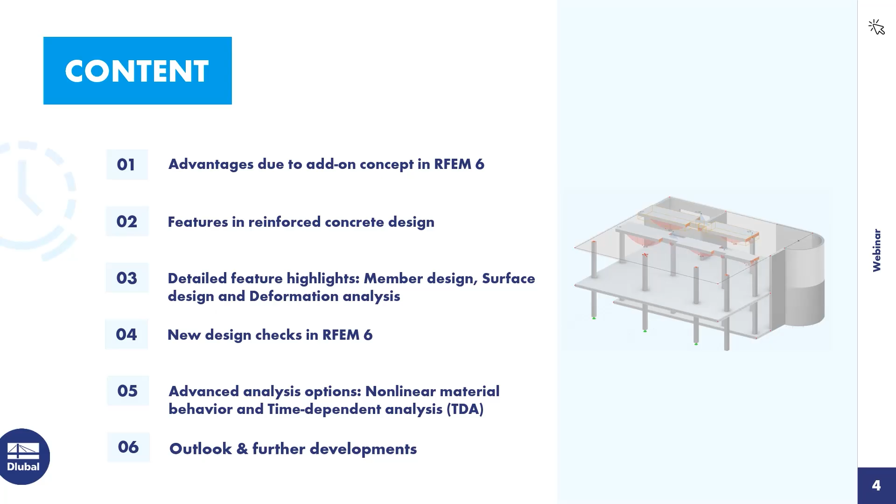The advantages due to the add-on concept: in RFEM 6 we have one add-on for the concrete design, and this add-on includes now all tasks which you need for the design of the reinforced structure.

If we compare it with our RFEM 5 solution, we had single add-ons, and it was necessary to make the design for the beam, for example, in the add-on RF Concrete Members, the column design in RF Concrete Columns, and the slab and wall design in RF Concrete Surfaces. If you wanted to make a punching design for the slab, you had to open an additional add-on named RF-PUNCH Pro. Now in RFEM 6, we have everything included in one add-on, so there are no single add-ons which you have to use.

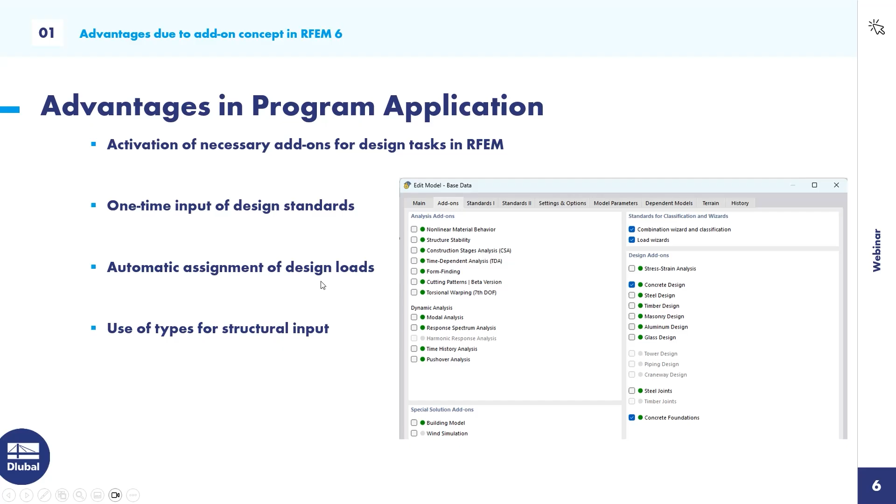This is what you want to use for the design of the member, of a surface, of a deflection, of a punching node. In RFEM 5, you had to define in table 1.1, the first table, always the design loads. In RFEM 6 this is done automatically. I will show it in RFEM directly.

I will go here into the base data, which I mentioned before. Here we have the selection of our add-ons, and you see the standard. I've defined the standard and the national annex for the concrete design. And if I have activated more add-ons, for example steel and timber, I can activate it and choose my design standards here.

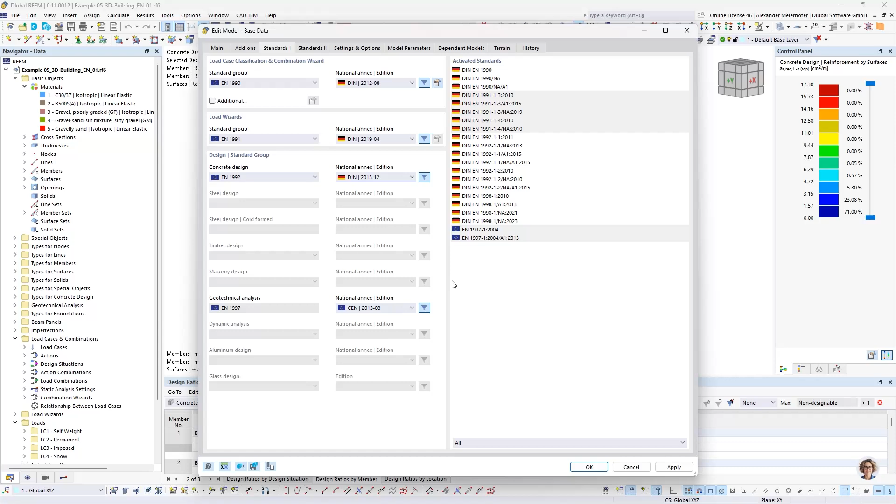I can choose also my design standards here, and you have all activated standards in the list. This list is also in the protocol. It's very well documented so you can see what standards are used for your design.

And the same thing applies for the used load combinations - what load combination will be used for the design. We have design situations, so we have ultimate limit state, and for serviceability the quasi-permanent and frequent or characteristic design situations. For each design situation, you can select what design add-on should use the included load combination.

If we go to the overview, we see, here it's only one, but in the next one we have these load combinations, which are already generated and will then be used in the concrete design automatically. If I do it when I define my loads, it will be automatically assigned to the add-on for the design.

Further, in our new concept of RFEM we make use of types. We avoid, in development, having the user do some inputs multiple times. For example, if we have our columns, these columns have a buckling length, and this buckling length is then defined only once.

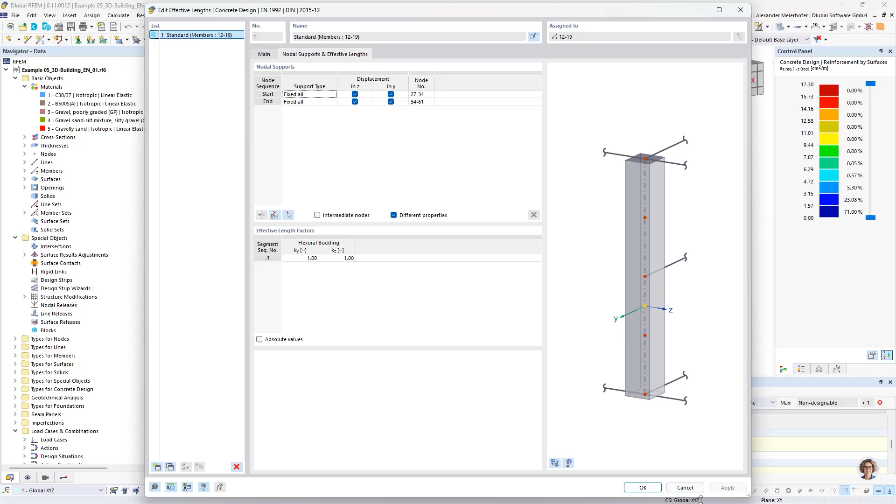Then the next topic is for the design in RFEM 6. I mentioned in the first topics that the design of surfaces and members is included in the add-on. It is not only included, it is done together. When we calculate it, we will have the design of members, surfaces, and punching nodes together in one calculation.

This is also a topic which is very good - we use, for example, one material for both members and surfaces. The creeping settings for concrete will now be done in the material properties. If we consider creep or shrinkage, we have the conditions and settings there, and it will be calculated automatically for each cross section and for each surface, then used in the calculation.

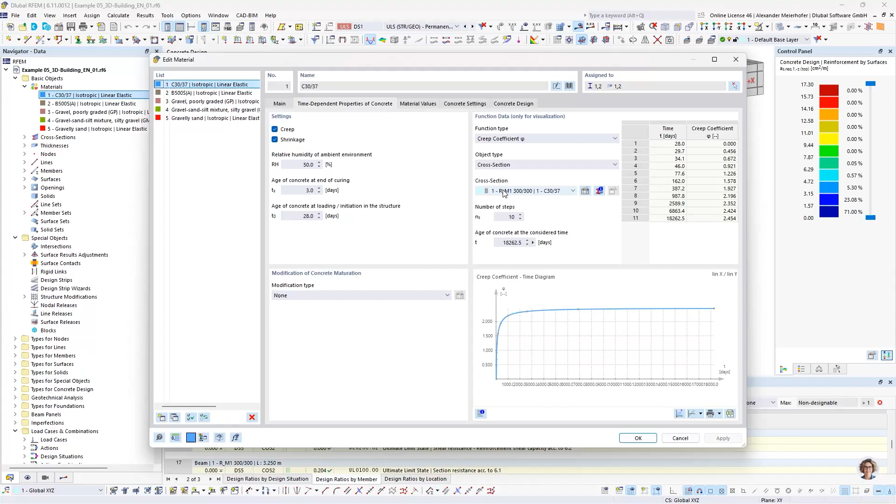If you remember the way in RFEM 5, you had to define the creep and shrinkage parameters in RF-Concrete Members or in RF-Concrete Surfaces, and if you considered it in the stability design, then also in RF-Concrete Columns. So this is a big benefit.

Further, in RFEM 6 we have very good control of our design checks. Each design check will be controlled by some configurations. So, for example, for the ultimate limit state, we have every design check available and can activate it. We have the settings for it, for punching, what will be done, how are the limit values.

Every design can be controlled. You see here for members, for columns, for surfaces, and for punching, everything together in one place. You can apply it to multiple objects and change the settings, having different settings within one global structure. So you're totally free in the control of the designs.

Then for the serviceability configurations, we have one new thing which is very good. Firstly, we can activate each design check. And the feature we have here is that we can use, for example for the crack width calculation, a different design situation.

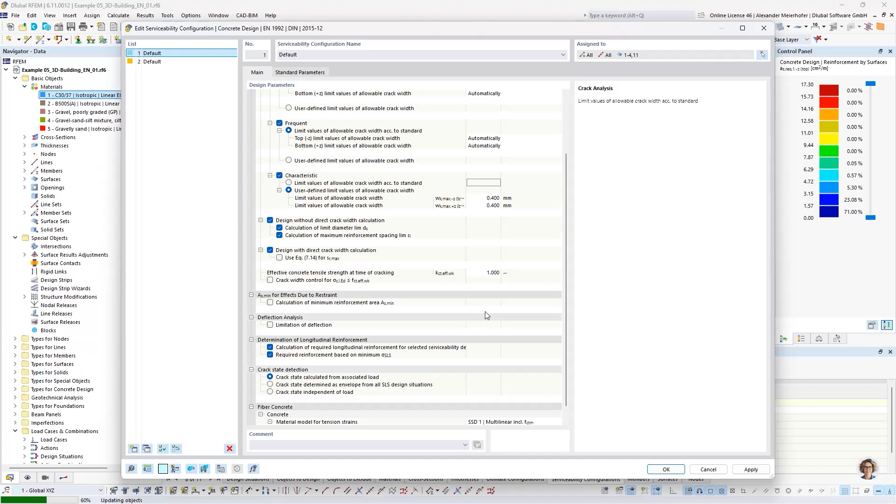Then we get additional results, where the results are split between the design situations.

What we have here also new in the input type for concrete are our durability classes. This type is used very often. You define these durability or exposure classes for your member or surface, and then assign them to each member or surface you want. This durability class is then used, for example, for the columns, and you automatically get the minimum concrete cover necessary for the design.

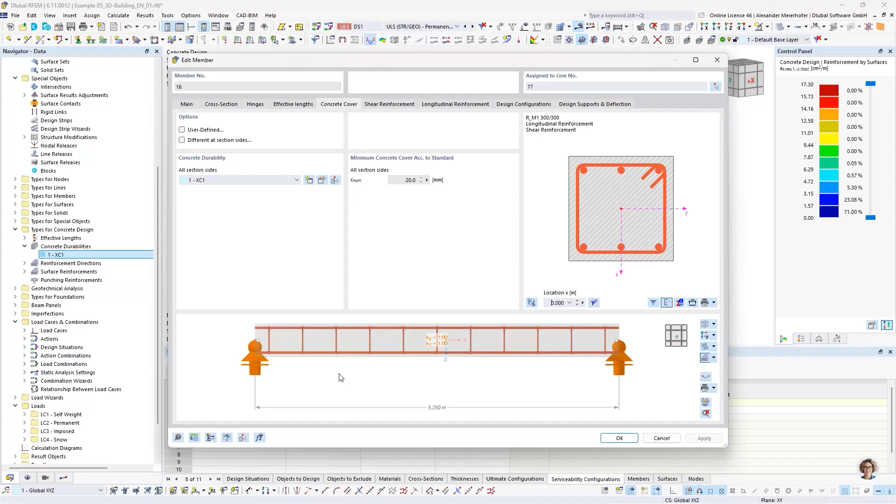The next benefit is that with this durability class, we automatically calculate the limit value for the crack width calculation.

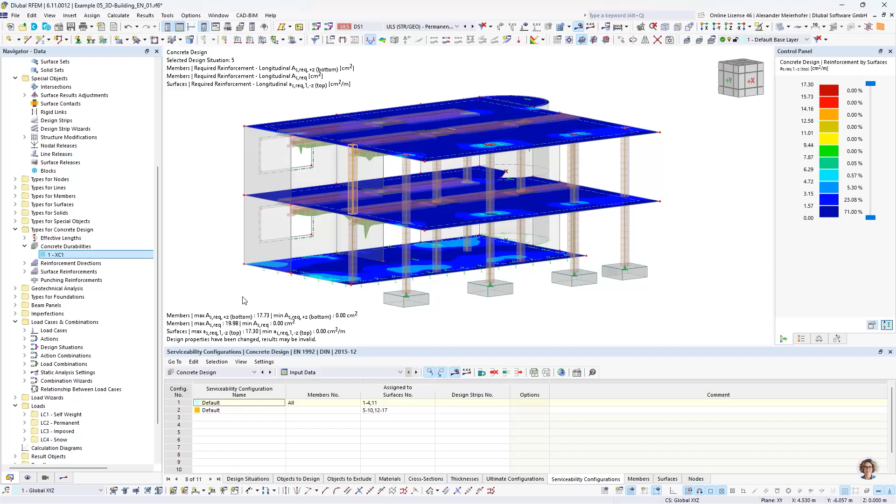One topic we don't see now is that our add-on calculation can use the multiple calculation cores available on the computer, which is a very good performance improvement. This was also not possible in RFEM 5 for the design of members or surfaces.

Now we can go to our results. The results are very detailed, and you can take a look at every design check. You have a sort according to the design ratios for members, the reinforcement for members, design ratio for surfaces, or for the punching nodes.

If we go to the members, the calculations have to be done again because I changed the setting for the crack width calculations, so now we have to design the building again new. We make the crack width calculation and calculate the required reinforcement for the crack widths and the stresses.

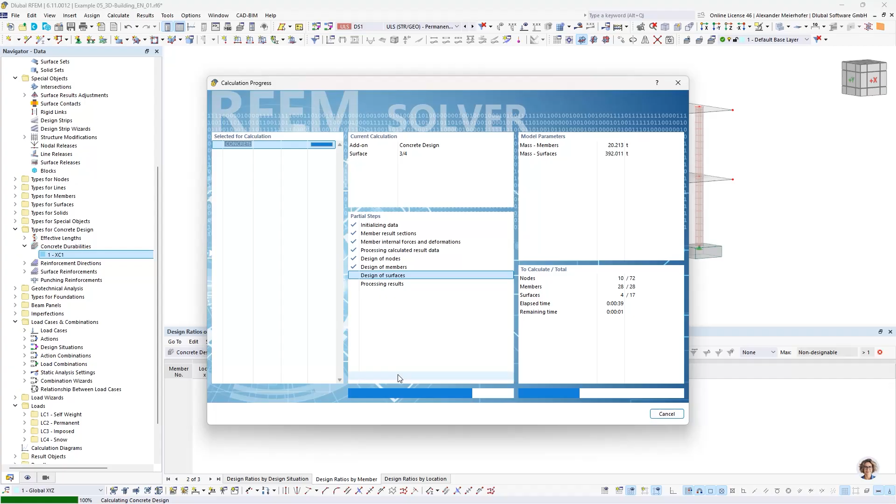This is also new, and was not possible in RFEM 5, to get the required reinforcement for example for the limitation of the maximum concrete stress in the serviceability state. These are completely new functions which were implemented, and this will help the user in his design work.

We see here we have every design check listed, showing what was done. For ultimate limit state we have many filters. If you want to see the serviceability checks, we can activate it, and we always see the design ratio and what was designed.

Further, for each design check we have all the variables used in the calculation here in our tree, so we can control the calculation. One highlight is that we have an info text, completely shown and written like a hand calculation, so you can follow the design for each location.

You will get the resistances and see how the calculation was done, and at the end you will see how the ratio was calculated and where it comes from.

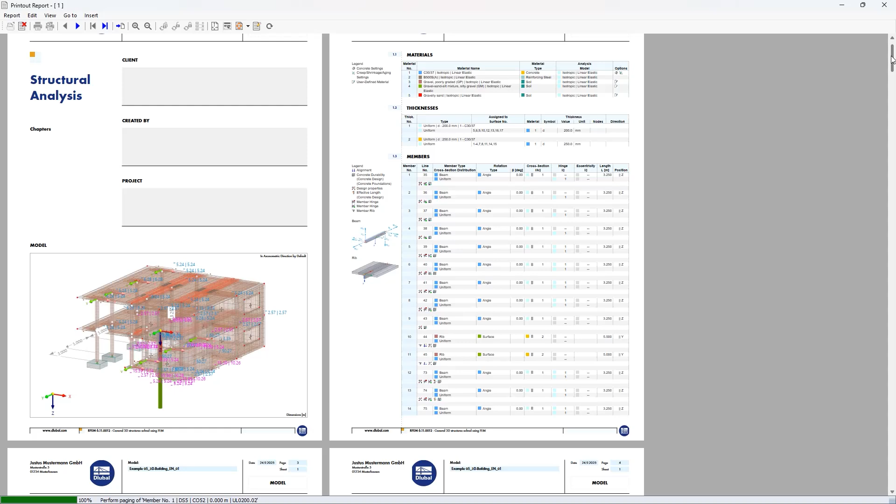I already printed it to the printout report. This is also one new highlight in RFEM 6 - our printout report was completely reprogrammed. Now it loads very fast. In RFEM 5, we sometimes had problems that generating the printout reports took a long time. So in RFEM 6, this is better.

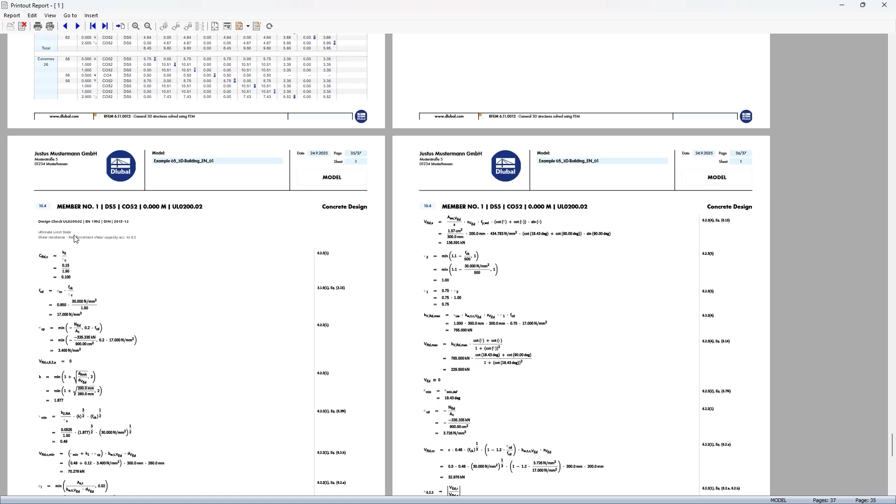We can work on parallel windows. The printout report can be open while you work parallel in the RFEM 6 window, sending images and so on to the printout report. Here you see the design check I printed before to the printout report, and you can follow the complete calculation step by step. It's a very nice feature.

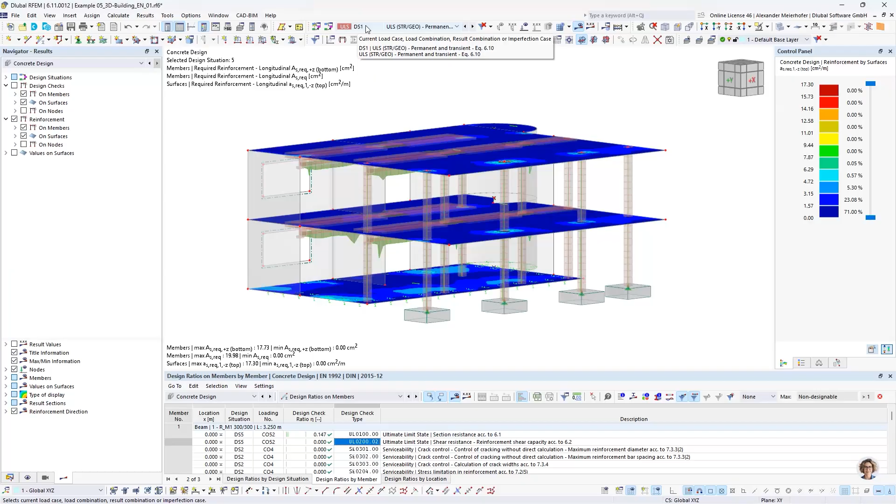A nice feature for the calculation is that you see here in the navigator all results for surfaces and members together, so it's not necessary to switch between design add-ons like you have to do in RFEM 5. If you want to see results from members, you switch in the main combo box, and then you see only the results from members, or for surfaces. Here we are able to see the results together for the required reinforcement, for example.

We can see the punching nodes if we want to activate it. At the moment we have the design checks, this is the proof from the defined provided reinforcement, and you see the safety factors and the ratios. The other topic is only the reinforcement, so you get the required reinforcement or the provided reinforcement, and the not covered reinforcement, which is the difference between the required and the provided reinforcement.

This is very helpful for the user if you have too little reinforcement, then you see directly the required value which you have to add.

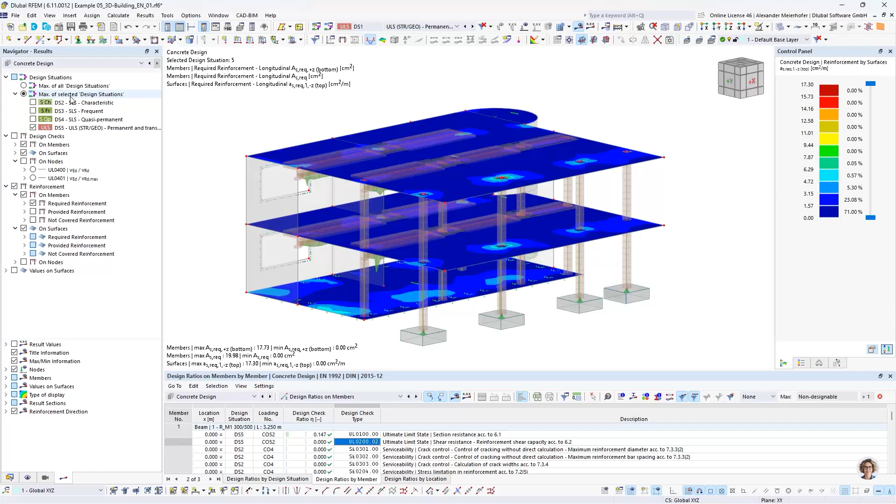About the results, if we go to the required reinforcement, we have a possibility to see the results as an envelope for the whole design situations. This was the situation in RFEM 5, where we saw always only an envelope. Of course, this is what we need.

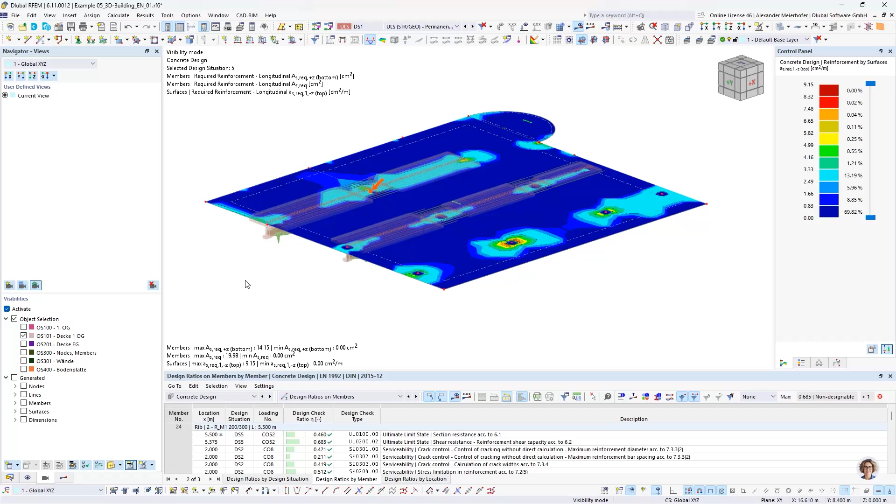But if we want to see the results for different design situations, for example what reinforcement is necessary for the limitation of the crack width, I show only the slab over the first floor. I go to the result navigator, and I'm interested in what reinforcement is necessary for ultimate limit state. If you take a look at this column, we see about 7.5 or 8.5 square centimeters required.

And if you want to see what is required for the crack width calculation for quasi-permanent load, we see in this area there are the cracks, and we need about 6.08. If we go to the next design situation, because it was increased, we see we have 7.6, because of the higher load of the characteristic situation and the defined limit value for the crack width.

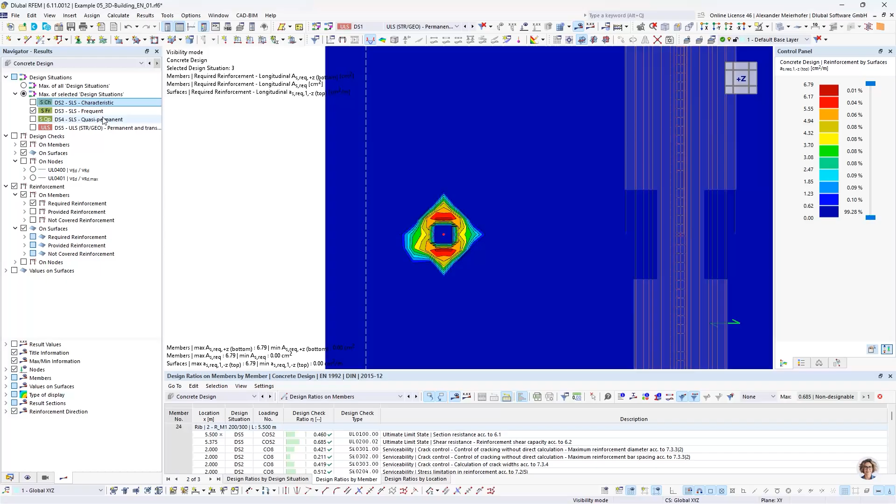So it's very good to see from where comes my required reinforcement. We can see it here in the graphic, and it's also possible to see it in the info text.

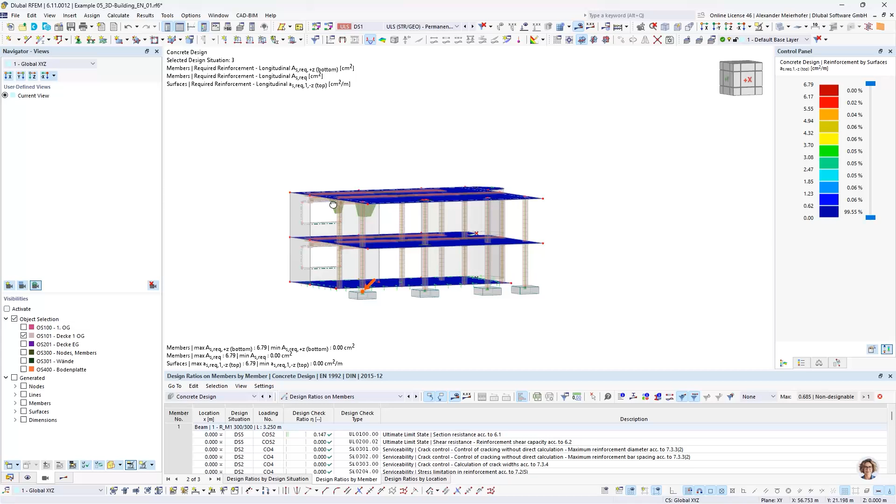One topic which is very good and will also improve your daily work in RFEM 6 — I will show again the structure — is our new development with intelligent deletion of the results.

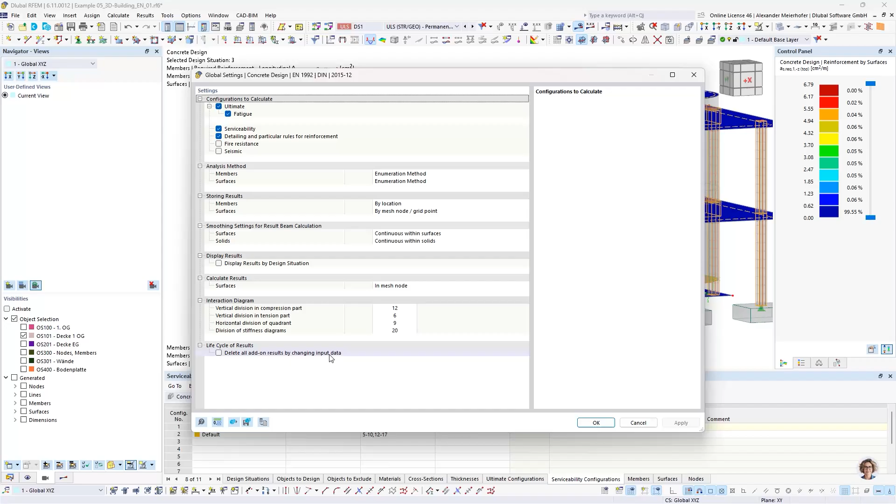At the moment, if you want to use it, I will show it. This check must be activated so that the deletion of all add-on results by changing the input data will be triggered. This is the behavior which we have in RFEM 5: you change one property or one setting of one object, then all results are deleted.

For example, I go to this column and go to the reinforcement, and I want to use a surrounding reinforcement, uniformly surrounding, say 8 with 14. And I want to have, for example, also cross ties. This is also a new feature we have developed, that all reinforcement will be caught by a stirrup or by a cross tie, and press OK.

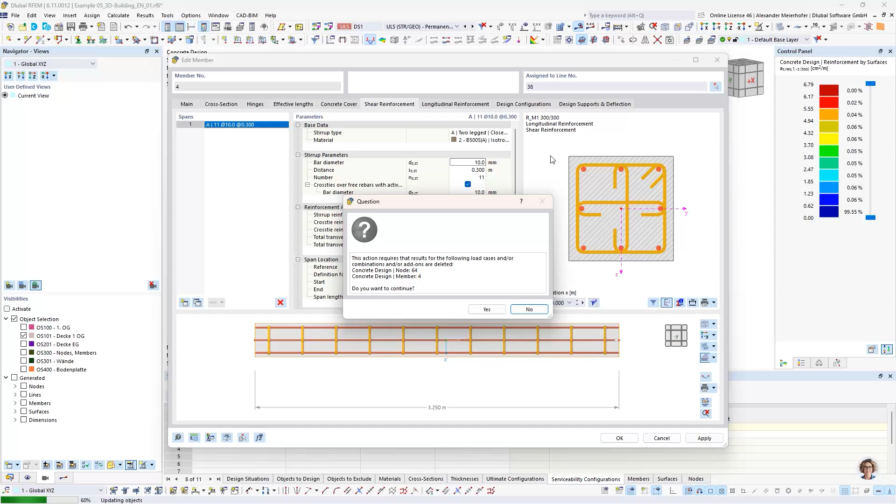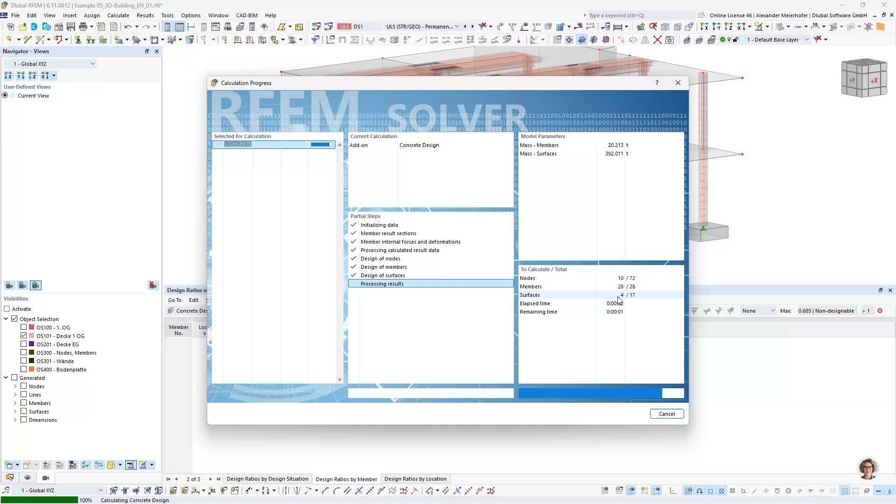Then only the results of member 4 will be deleted, and if I press OK, all other results are still there. We can check now the design ratio by members, and you see member 4 is now shown in red because these design properties were changed, so we have to recalculate it. By double clicking on showing the results, only member 4 will be recalculated, and we have updated results. This is one big feature which will save you time, waiting time, and calculation time in RFEM 6.

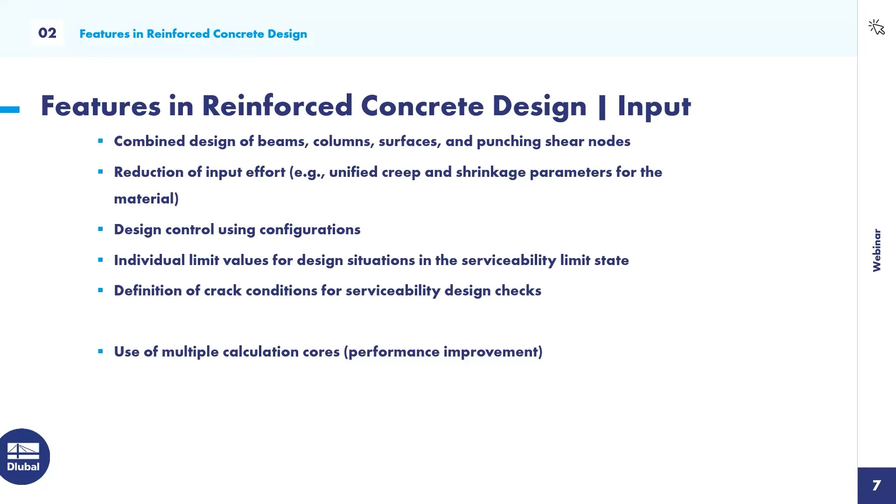So I will go back to my presentation. These features in the PowerPoint were shown in RFEM directly. If you want to read later all topics, you can download this presentation, and you will then remember very fast all named features which I showed in the presentation.

So next feature highlight, special highlights in the beam design is the input of our reinforcement. I showed it before a little bit. The reinforcement is now definable in our main program in RFEM 6.

It's not in the add-on like it was in RFEM 5. In the add-on you defined it, you had a small window. It was not editable in the main window. It was not usable for other designs. So now we are working in the main table.

Then we had a general control of the automatic reinforcement layout. This I will show in a few minutes on a small beam, what I want to say with it. RFEM 6 is able to find the needed reinforcement automatically.

And what I showed before, to define the stirrups, the cross ties, also to catch each longitudinal reinforcement, is a new feature which was not available in RFEM 5. It is necessary, for example, for seismic design, or if you have biaxial shear for columns, then you would need it.

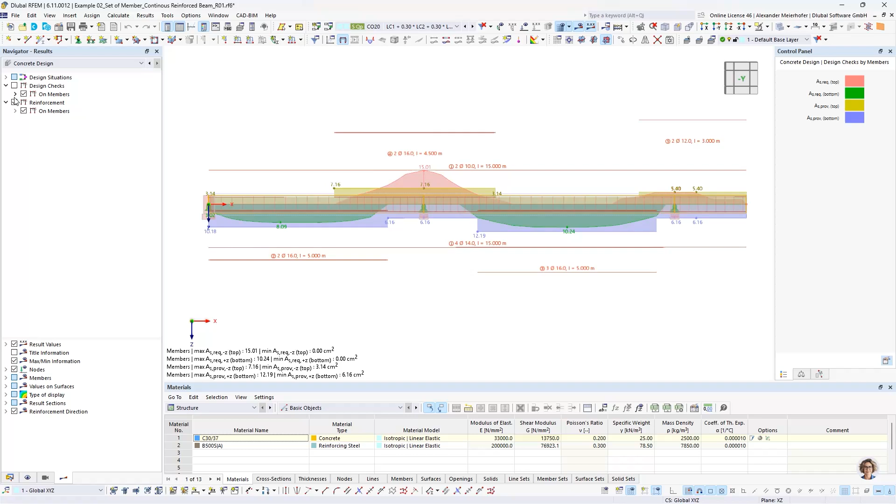So if I deactivate the results, we see here in the 3D the rendering of our reinforcement, and also the inputs are in the main diagram.

If I go into my member here, I make a member set. So I designed the member set. We have everything together in this input. We defined the concrete covers by using the durability.

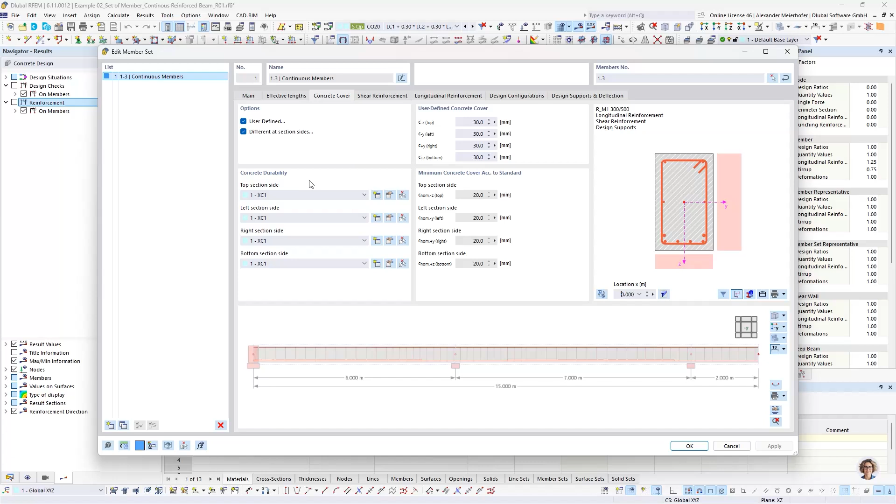We defined the shear reinforcement. We can use here then more spans, for example. It's very intuitive to go through these inputs with the bar diameter and the distances.

If we don't know what distances we would need, it is possible to use here our auto functions. This is what I wanted to show. You can use the auto function and say: find me a distance between 10 and your limit values, and the minimum increment should be 5 centimeters, and then it will be done automatically if you don't know it.

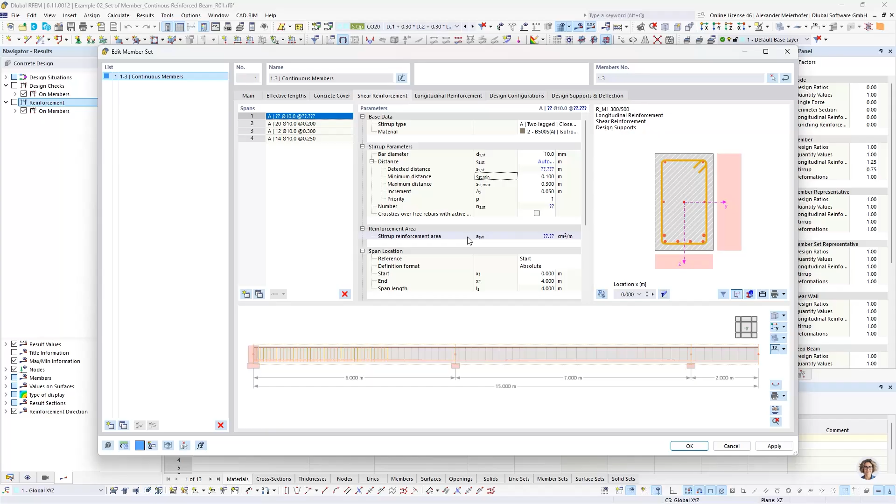Also, the longitudinal reinforcement is very intuitive for the inputs. We showed it in some previous webinars how it works, so I won't go now so much into the details. I only want to show you how the layout function will work on this example.

So I will firstly use our results. You see here we have overlapping results of the required reinforcement and the provided reinforcement.

So if I deactivate the provided, we see only our required reinforcement, and sometimes it is so that for some designers here is already something that the work ended. They need only the required reinforcement, then okay, then you have here the graph, the values you have, and you can send it to your drawer for the drawings.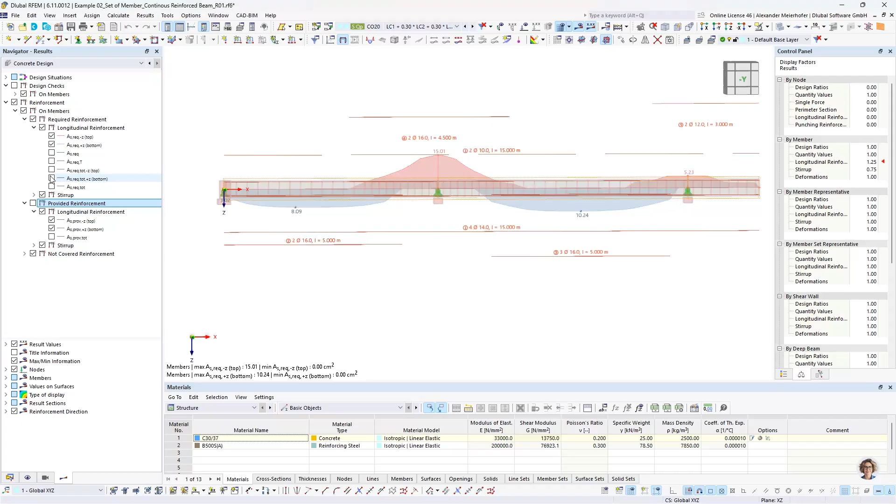But if we design here with realistic reinforcement, we can compare it. We have all tools in RFEM 6 which we need. So we see here over this support, my provided reinforcement is too little, I need more.

And to define here more values, I will go inside. So I can select also the rebar normally, the types for reinforcement. I have also to control that I deactivate the reinforcement, but I want to select now the rebars. You see now with the selection, if it is activated, I can select these rebars.

This was my additional reinforcement. With double click, I will come directly to my rebars now, and I know these are too few. And what I will do is change here the auto functions, so that the program should determine automatically the needed reinforcement values which we need.

So from 1 to 6, we have here place, and if I press OK, we will see the results are deleted. We have no number there. It must be done by the concrete design, and if I press the calculation, it will be then newly designed.

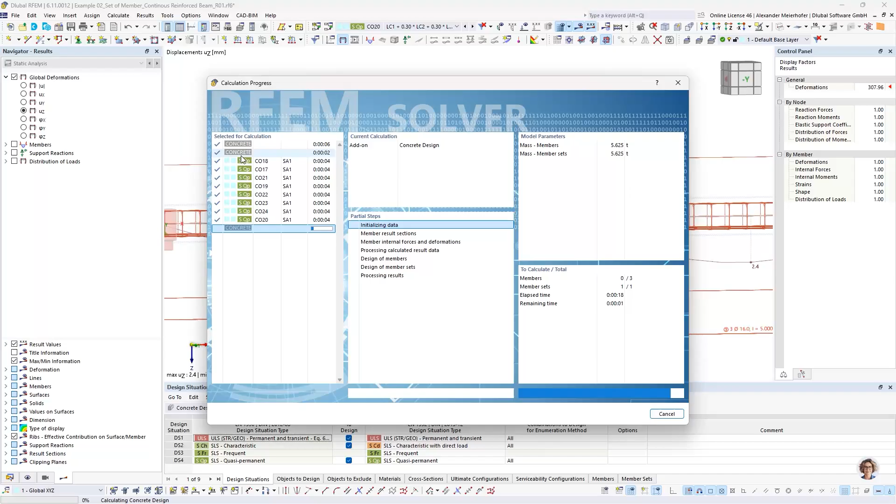We see that there are more steps with the effective stiffness method. This I will also show a little bit later.

So what we see now is that the provided reinforcement covers the required reinforcement. The program finds six rebars, and we see that it's filled, and the design is then fulfilled.

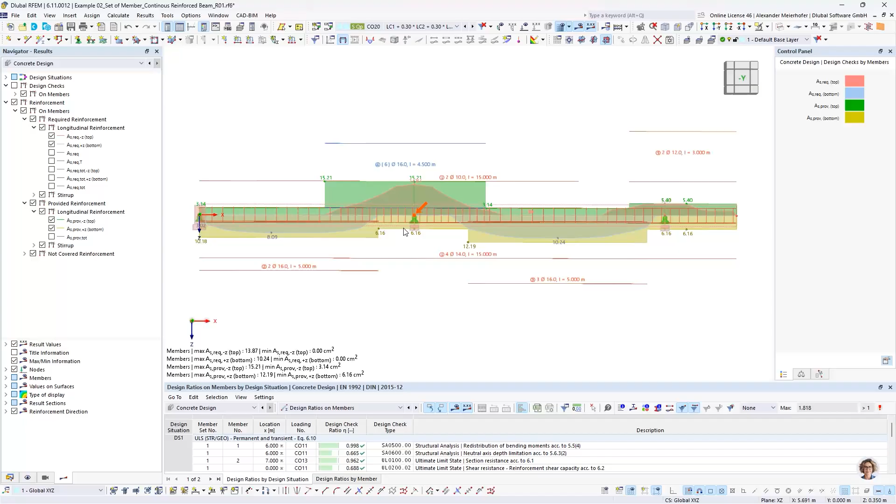What we can also use here is then for the rendering, for documentation. We have here a very nice window for the 3D rendering. We can rotate and select our view of beams.

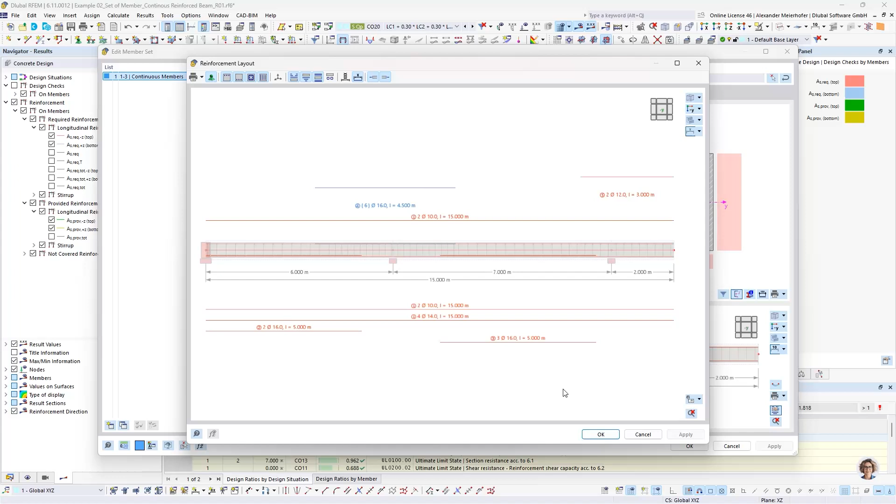Then, for example, I will only print my longitudinal reinforcement, make here a template, print the graphic to a template. This will be my longitudinal rebars of members. And then with this setting, I can use this setting for each member in the structure. Each member can be calculated in this way.

And if I want to have only the rebars, then you print the stirrups, sorry.

Shear reinforcement, and this will be also for members. Then if you make the multi-print, you can use this template for each member which you have in the structure.

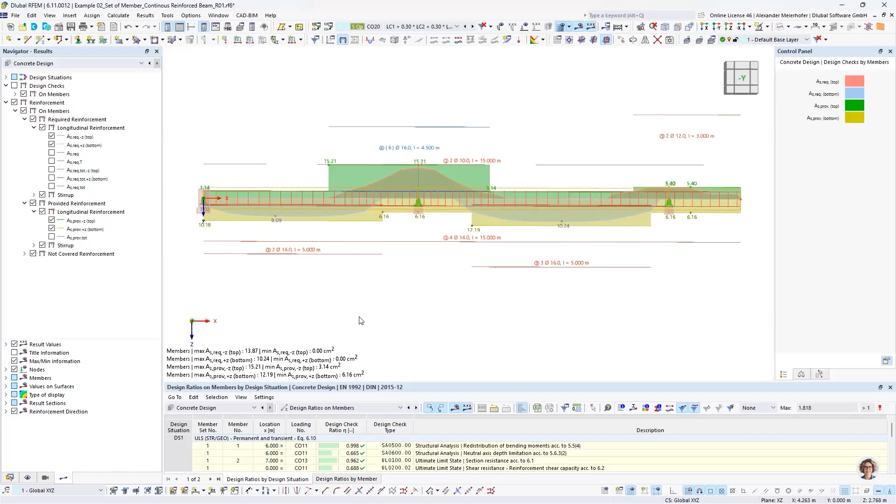Then for the beams, one top feature for the beam design is that we can use also the net concrete cross-section area for highly reinforced sections. So this is new, that you can remove the concrete area behind the rebars. If you have a very big reinforcement ratio in the cross-section, you can deactivate in the configurations the area behind the rebars.

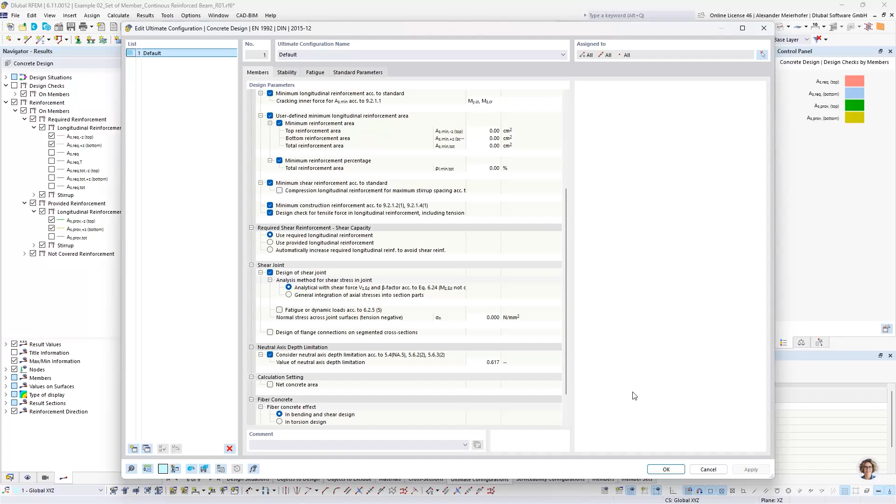Very simple, only in the configuration make the check, and then it will be removed. So it's also assignable to each member. Then what I want to highlight also for the member design are our results.

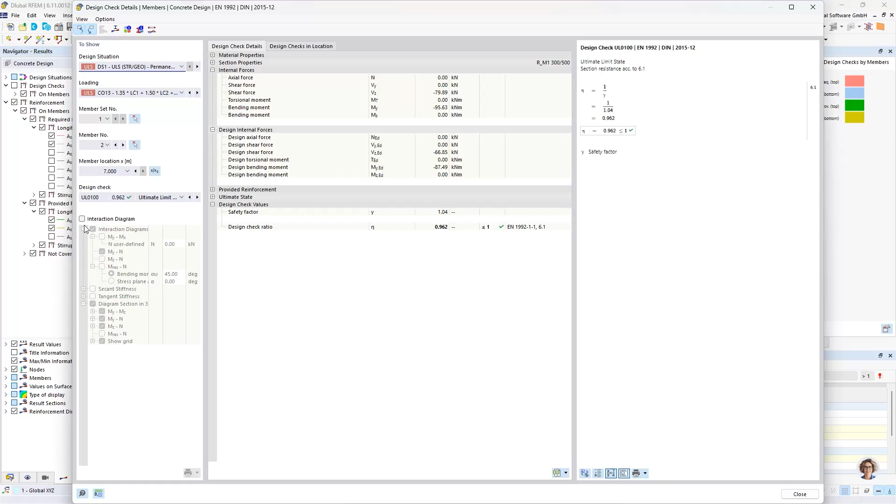First is this diagram, which is very good and can be used for the documentation. And then I want to go to our interaction diagrams, which are new. So we have here our interaction diagram. This is a completely new feature which we have now in RFEM 6. It was missing in RFEM 5. So we can select what we want to show, what we want to use.

We can then interpret our results. We can see the safety which we have, the moment safety where we are. The blue line is our resistance of the section. Then the green dot is our load, and we see we are nearly on the border. So we should have a design ratio about 1. If you take a look, it is 0.96, and we have also the resulting moments, which you can define with the angle of the moments.

Then we have the secant stiffness with the moment curvature diagrams and also tangent stiffness diagrams. Everything which you want and need for your work, you can activate and send it to the printout report. You have here the table values for your additional calculation when you need some curvatures and so on, or stiffnesses, you can use it from here directly and use it then in other applications, for example.

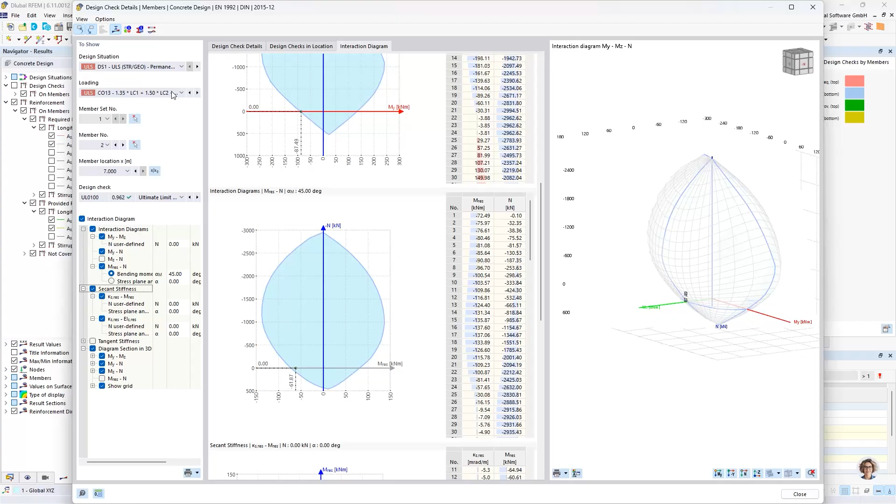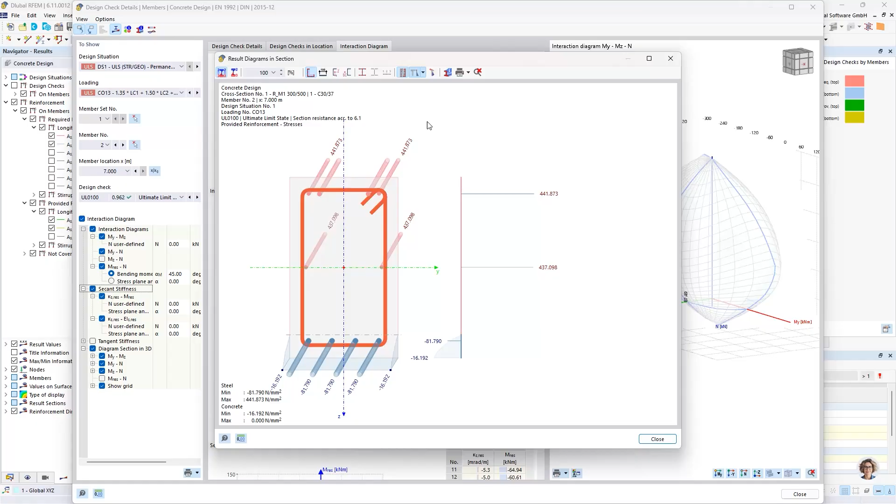Further, we have the stress-strain diagram in the cross section. We have here the stresses of the concrete, so we have the compression zone shown, and also the stresses in each of the rebars which is shown. And we can also make it in 2D, where we can see on an additional drawing how the stresses will be in the cut. This can be also used for some strains.

So if we go to the design tables for the provided reinforcement and go to the strains, state of strains, if we open the diagram, then we have the strains of the section for the provided reinforcement and can also see how the strain state is.

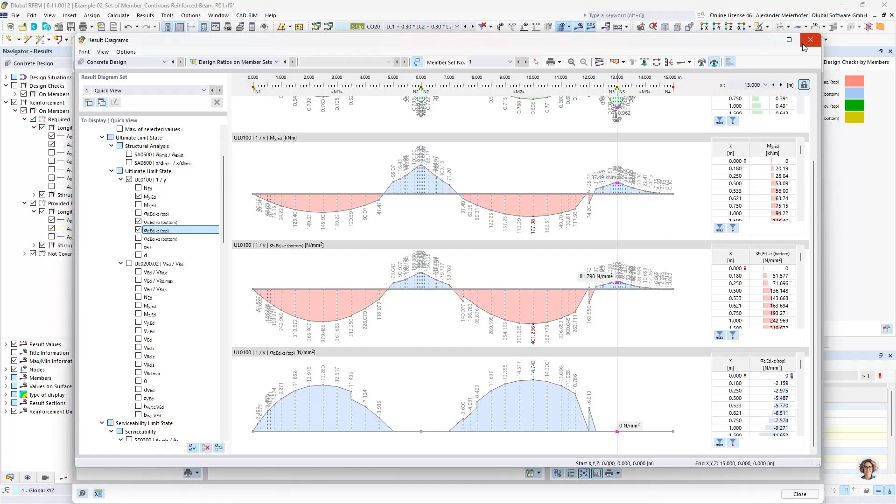We can also go directly from the design check to the results on members, and you can see here the safety factor shown, and about the safety factor we can also see the My,Ed, and this is the moment which was used for calculation of the resistances. And if you want to see the maximum steel stress, you can also see it on the bottom side. And if this is then on the top side, we have a compression. Everything is documented, and you can use it for your documentation in the printout report.

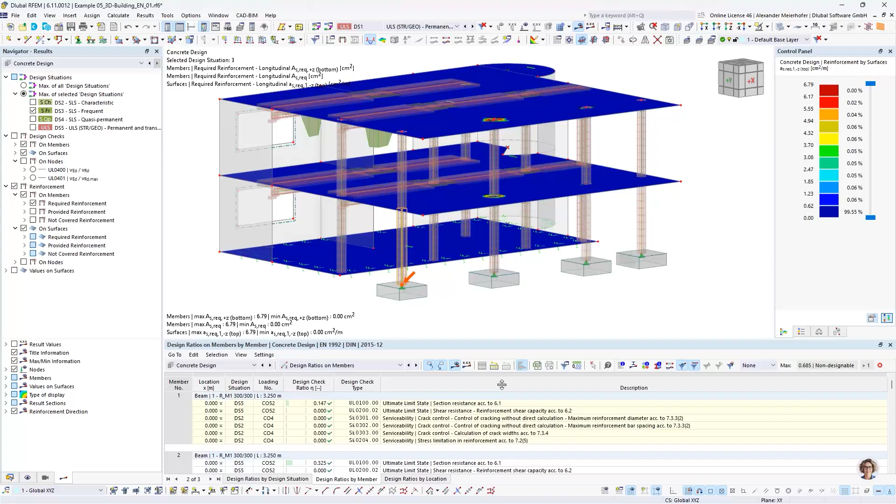Okay, this was then for the main topics for the member design. Then I want to go to the rib design. Here I go back to our main global structure which we had at the beginning of this webinar.

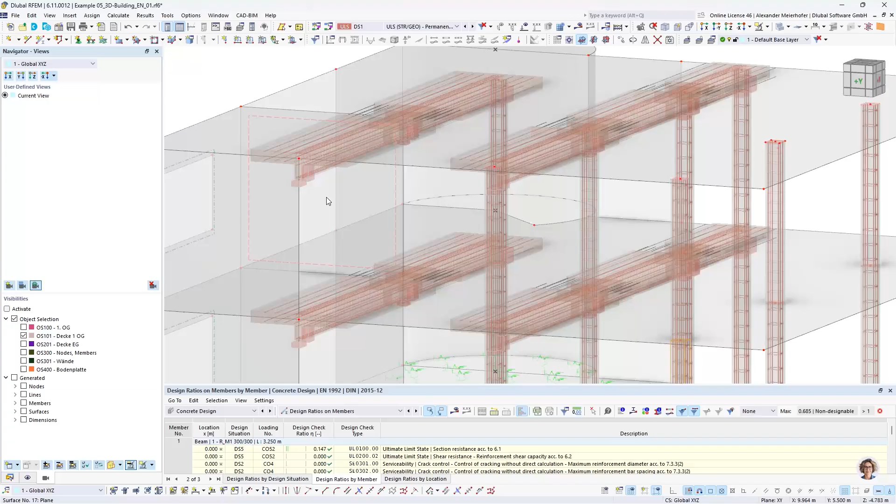And if I deactivate the results, you see here if we have some ribs. The rib was defined by a member, and this member then automatically gets an eccentricity, and will integrate the inner forces from the surfaces to the design of this T-section.

And we see here that we have different, I will open one rib, and we see in the rib, if we have the member type rib, then we say the rib is placed on the plus Z side of the surface, and we see that we are able now to have different segments of a member, where we have different widths for the integration of the inner forces and also for the design of the T-section.

This is according to the standard, to the Eurocode, for example, where in the field we have bigger values for the integration width, and over the column and the supports smaller values. We can also use this new width according to the Eurocode 2 calculation. It will be calculated according to the length of the segment, using the formulas from Eurocode 2.

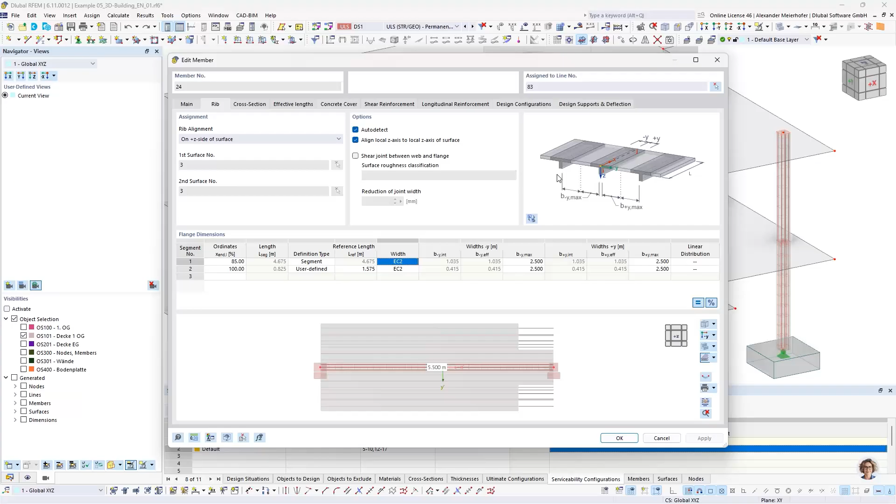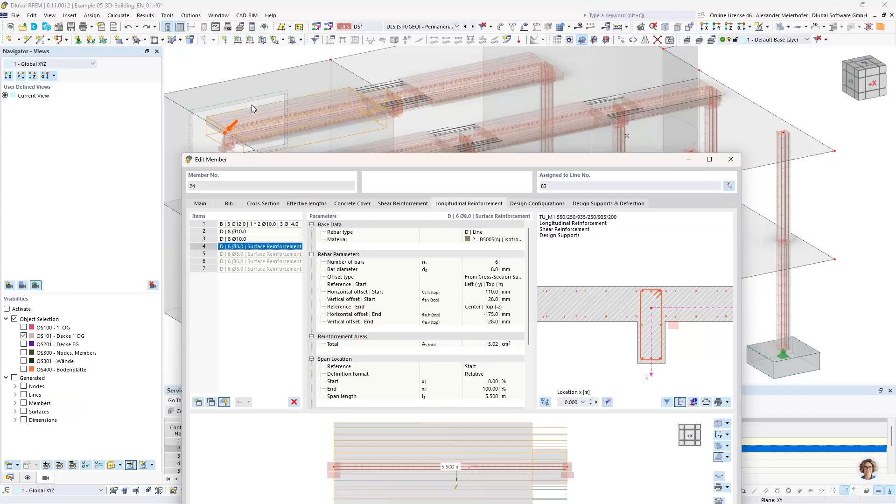Another nice feature shown here: if we have already reinforced the surfaces and want to design the rib as a member, we can directly use the surface reinforcement which was defined for the surface, and this will be implemented into the cross-section design. We load and find the surface reinforcement which was defined and define it here for our design. This is also a new feature compared to RFEM 5.

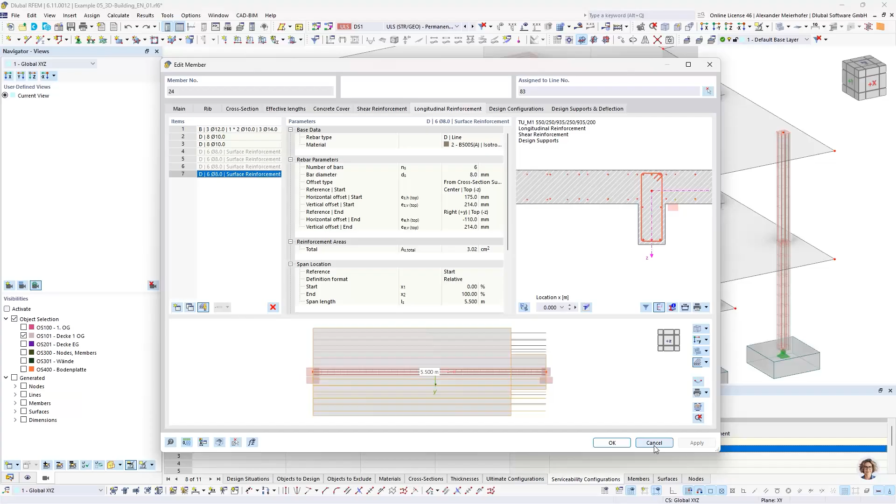In RFEM 5 we had the situation that we had to do it twice. And one thing which is new for our members as well in RFEM 6.

We can define the general cross-section geometry for our member, define the reinforcement in our sections. This is an additional application, and we load this section for the static analysis in RFEM, and we can then design for moment and normal force on this general section directly in the Concrete add-on. It is not necessary to export the inner forces and load them into a separate cross-section application - it is directly done in RFEM.

Now I will go to the highlight for the surface design. Surface design now has the possibility to define the reinforcement in our main table in the main window, like it was also for members. This reinforcement is an object, which means I can use the manipulation tools, for example for copy or mirror, on the defined inputs of our surface reinforcement. We also have an automatic layout function for the surface reinforcement, like I showed for our members.

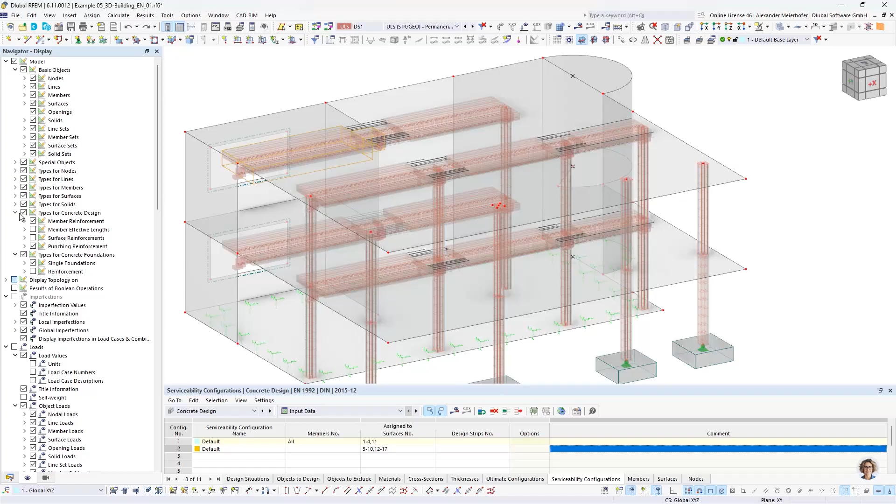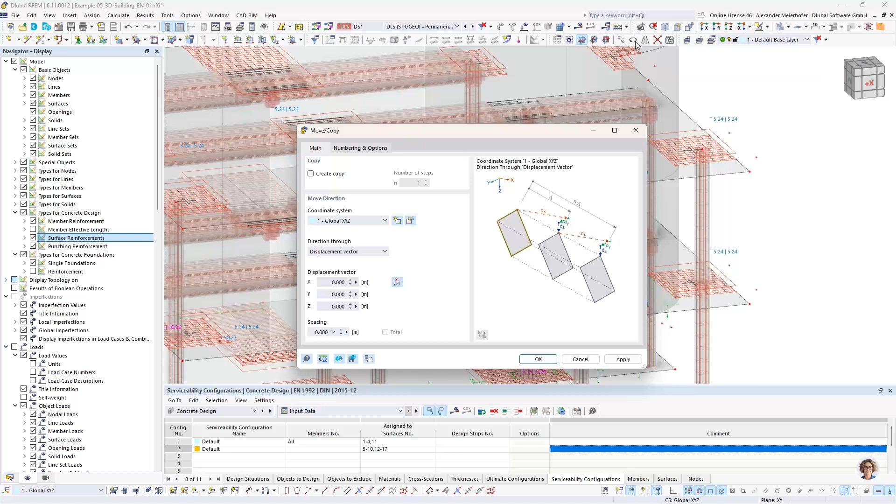I will go back to our structure and activate the reinforcement for surfaces to show what I mentioned. For example, if I select this reinforcement over the column, you can select it like each object, and you can work with our manipulation tools - rotate, copy, mirror, it doesn't matter.

Create a copy from this point to the center of this column. And if I copy it only one time, then it's here and you can use it again in the assigned surfaces. You see this reinforcement was defined to act in the slab here and in the slab under the ground floor.

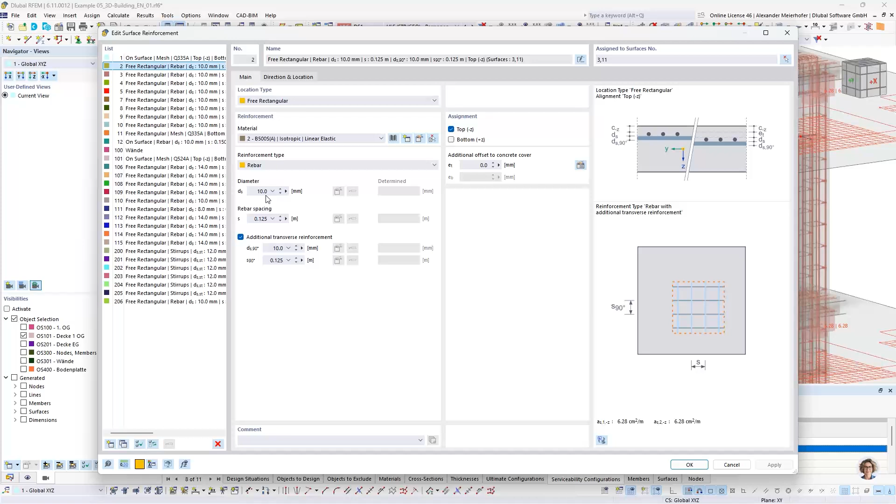The next feature, as I said before, is that we have the automatic layout here. How does it work? Let me just show it. For the automatic layout, you can activate the automatism for the rebar spacing - if you don't know what is necessary, you can say find my necessary spacing automatically, similar to how it was done for the members.

Okay, then we go to the presentation - punching shear check is integrated. That's right, this is what I also said. We have the punching shear check directly in the add-on, which means the surface reinforcement will be automatically taken or used from our inputs. It is not necessary to do it twice because everything is in one add-on and not a separate one. In RFEM 5 you had to define the longitudinal reinforcement in the add-on RF-PUNCH Pro separately and again, or additionally, is the right word.

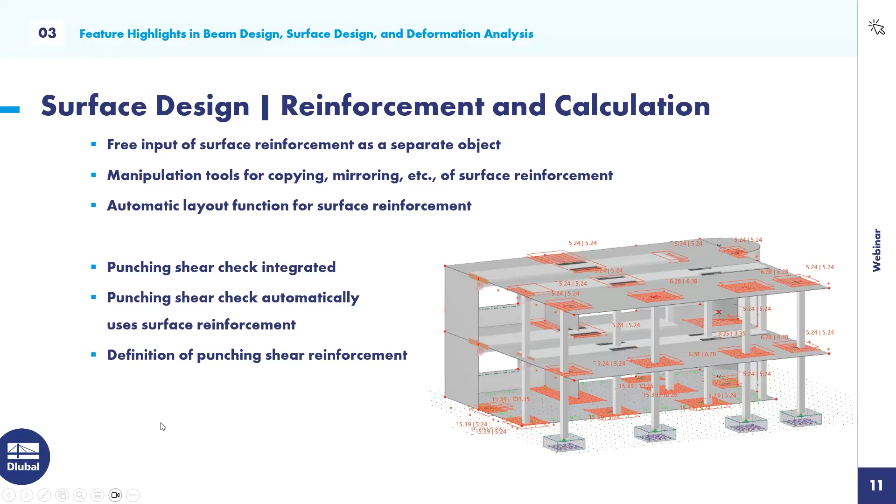And what is new now in RFEM 6 is that we are able to define a punching shear reinforcement. So you can define the shear reinforcement for punching, and then we make the design check and proof for the punching design. So let us go to the next highlight for the deformation analysis.

The deformation analysis, as I said in the first slide, is included in the Concrete Design add-on, and this deformation analysis is based on the effective stiffness method. This effective stiffness method is a two-stage calculation: first we calculate the inner forces with linear elastic calculation, then we calculate on the cross-section area the effective stiffness, whether it is cracked or not cracked. This effective stiffness is then written to the finite element solver, and we make a second, additional analysis for the deformation.

This two-step calculation is now new for beams. In RFEM 5 we had a more simplified solution, which was more on the safety side, but now we have a more accurate solution where we use the stiffness in each element of the beam, to get better results.

Also a big topic is that we calculate the deformation now over the whole structure, so the members, the reinforced members and the reinforced surfaces are acting together. It's not so that we calculate only the deflection for members and only the deflection for surfaces, like it was done in RFEM 5. Now you have an interaction between the members and the surfaces or slabs.

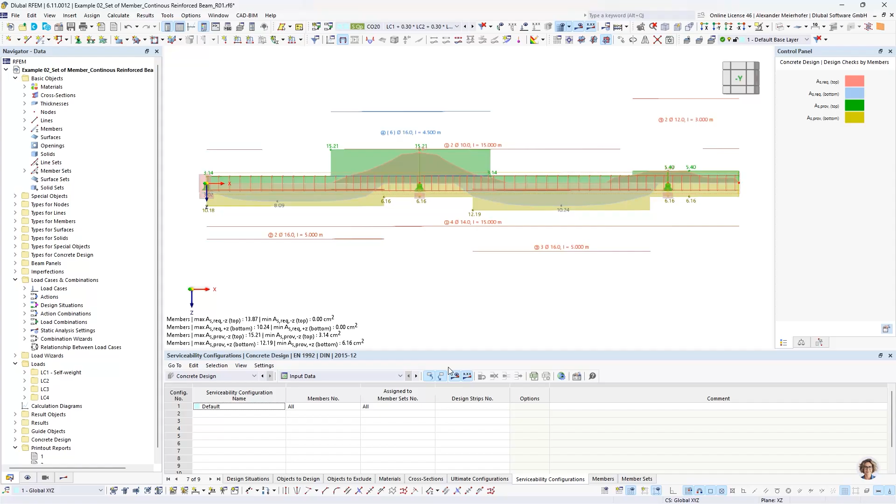What we can do is also control the crack formation or crack state for the deformation calculation. This is also new. We can control in our configuration what state of the cracking will be used - here is the crack state detection. The simplest way is to calculate the crack state from the load situation which I analyze.

There could also be a situation that the crack comes from a frequent load situation, for example, because it's acting before the quasi-permanent load is coming. In this case, you can analyze the SLS design situations, and then you get an envelope, and from this crack state you calculate the deflection. You can also calculate the deflection on the safety side, always independent of the load, always in the crack state, always with the stiffness in the cracked state.

What we can do is also consider some minimum damage factor. This means if you want to consider some micro cracks, you can use a kind of minimum damaging. What is also new, we can show graphically and in the infotext our damage factor, and this is a very good tool which can help you understand the results.

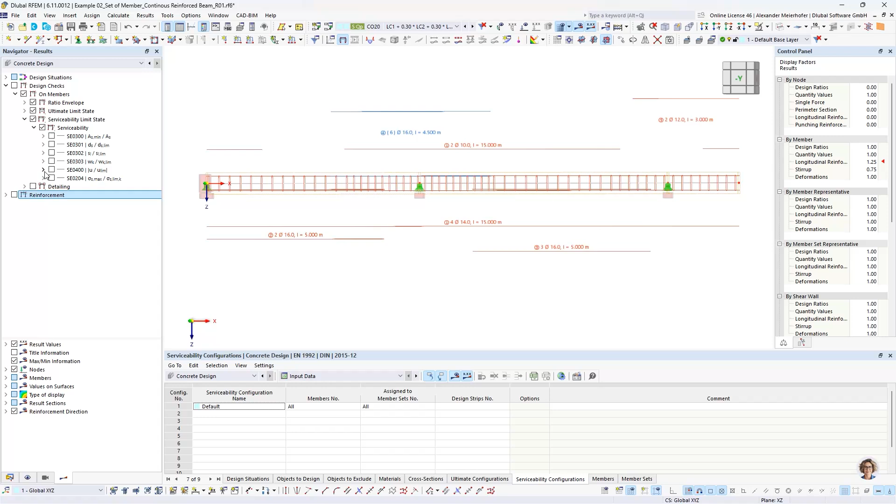So if we go to our deformation, we have firstly the calculated deformation in the crack state together with creep and shrinkage. To understand why it is so, for example, we have now quasi-permanent, and if we want to understand it, we can see here the zeta values. This is a damage factor, and we see that in this area we have cracks, here on the top side cracks, and also in the field.

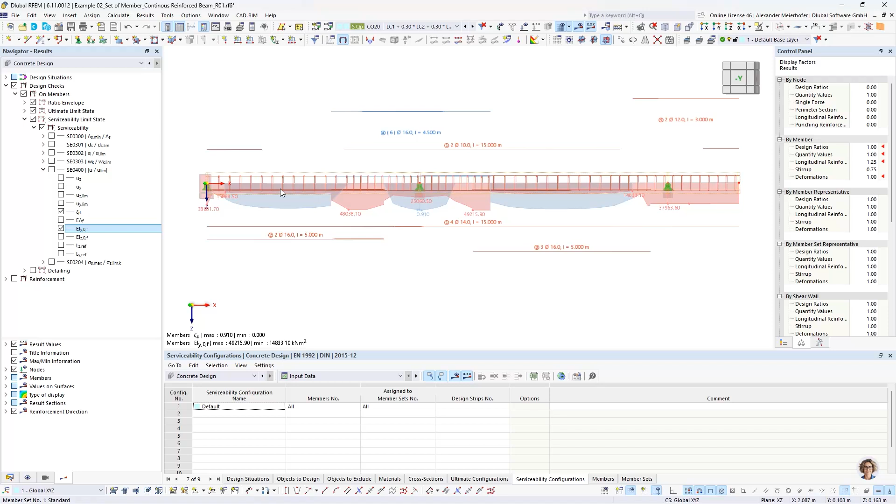Zeta equal 1 means totally cracked cross section. Here we have nearly a total crack. We can also see the effective stiffness if we want to see it. Where zeta is 0, it's uncracked state - we have the full stiffness. In the crack state, we have only the smaller stiffness, which is nearly at the cracked state.

This possibility is also enabled for surfaces. It's in the same place - you can activate it, and you see it for surfaces.

I will go back to the PowerPoint presentation. The next point is that we improve the consideration of the creep influence in the effective stiffness method.

In RFEM 6, we now make an investigation of the crack state before creep and after creep. It could be that the cracks appear before the creep, so in short-term situation, or in long-term state. So we make now additionally two calculations - we calculate the crack state before and after the creep state, in the analyze state. What we are developing at the moment is in development and test state, so we check the results and hope we can release this in the next weeks.

The creep deformation will only be calculated for the quasi-permanent load part of the total load. So only the quasi-permanent load part gets the creep influence, and will be additionally considered with the additional short-term deflection from the higher load level.

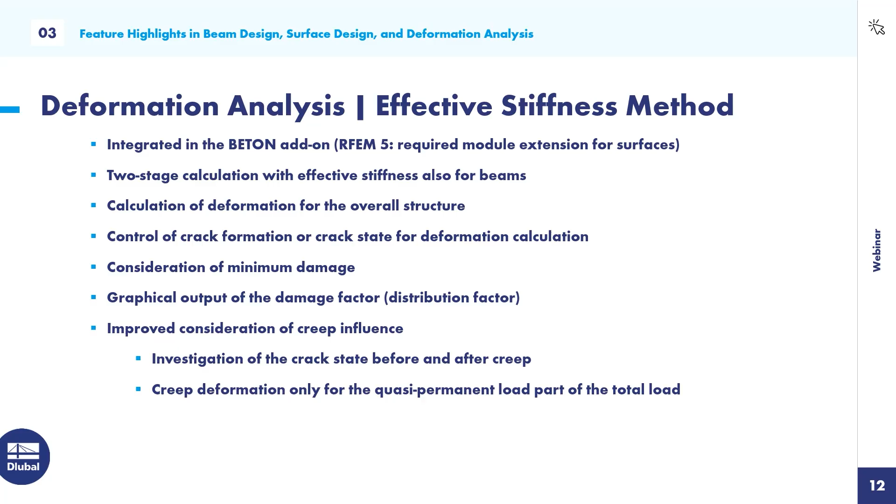Now we move to the next point - the new design checks in RFEM 6. One very often asked design check in RFEM 5 was the fatigue check. In RFEM 6 we have now implemented it - it is included in the add-on. You can make the fatigue design check according to Eurocode with the simplified design method, or with the method using the damage equivalent stress range.

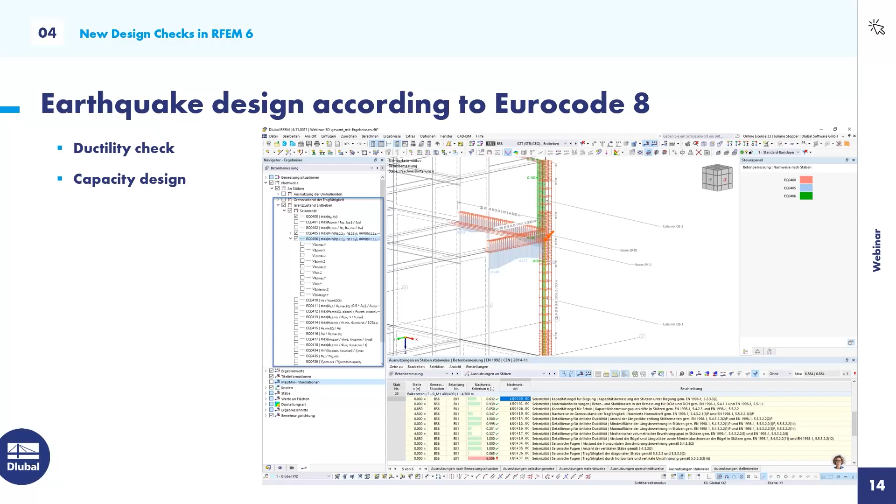Then what we have also completely new in RFEM 6 is the earthquake design according to Eurocode 8. So we have here the ductility check and the capacity design check available. Further, we can design the coupling beams with diagonal reinforcement for the shear.

We have also included now the design of seismic walls. So we see here, for example, a seismic wall together with the building model. It will be found automatically in one step. And you see here, for example, the design shear wall. It's an envelope for this seismic wall.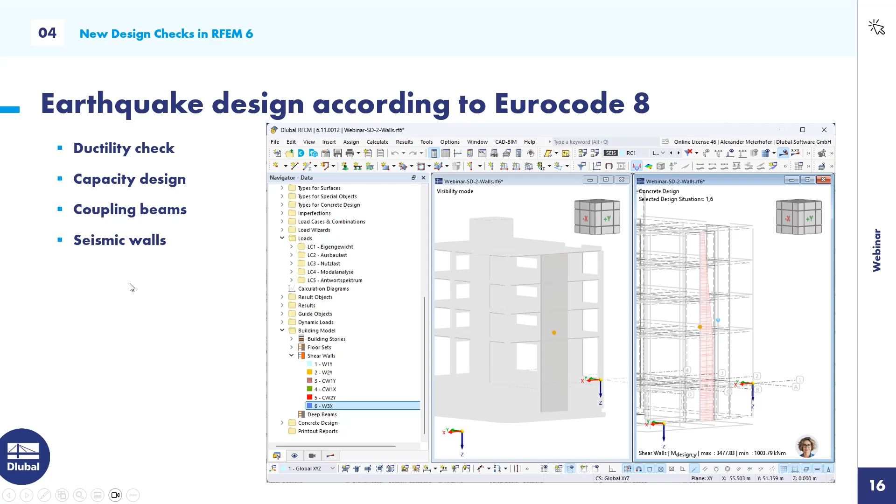And one design check which is now new is the beam-column joint nodes, that we can design it. So we see here the design of this node from the beam and columns. This is very new, we released it 2 weeks ago. So it's a brand new design check in the add-on.

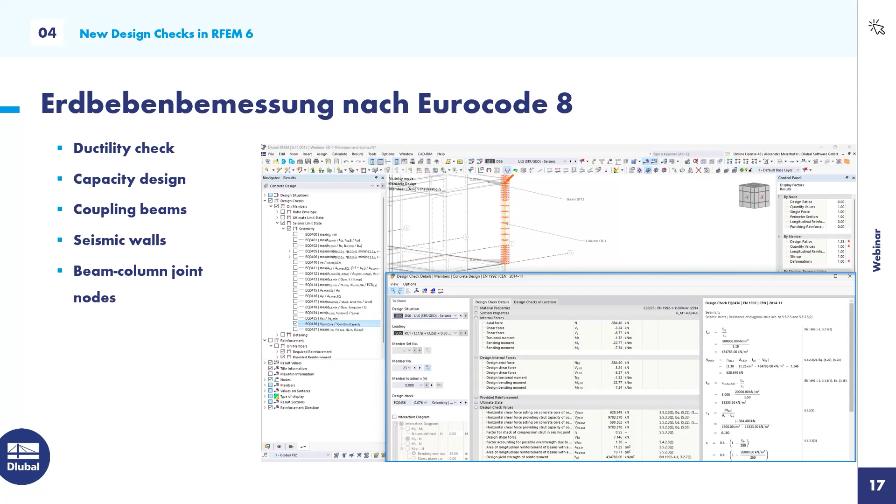Additionally, there are new possibilities or design checks, that we can design steel fiber reinforced concrete according to the German guidelines for steel fiber concrete. They are similar to the rules in the upcoming Eurocode 2 generations.

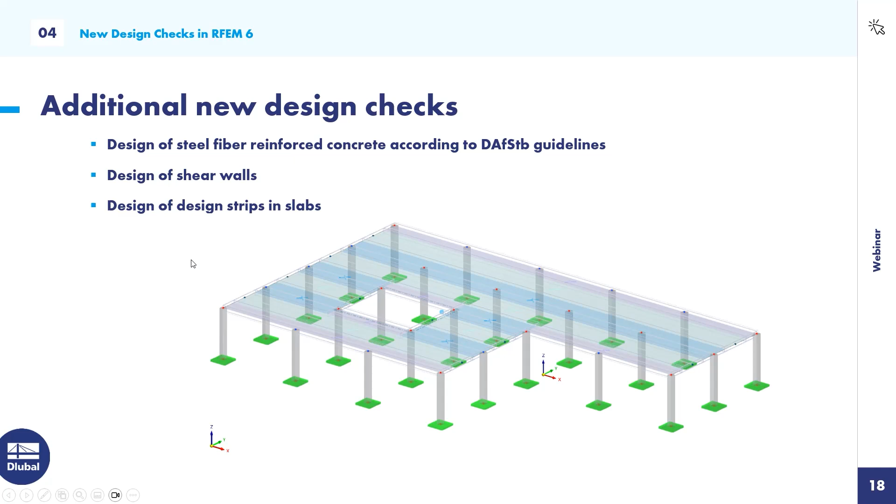Then we can design shear walls, and what is also very new, we can design stripes in slabs. So we can say where are the slabs. If we use the building grid, it will be done automatically, and the design stripes will be generated. It means we integrate the inner forces from the surface to be able to define the stripe with a cross section as a member. This comes from the United States. The ACI or Canadian standards are working very often with these design stripes for the design of slabs. So now this is also available in RFEM 6.

Let us go to the advanced analysis options which we have in RFEM 6: the nonlinear material behavior for reinforced concrete. How was it in RFEM 5? In RFEM 5, it was so that you had to activate the additional add-on RF-CONCRETE Nonlinear.

Then you only had the possibility to define or calculate nonlinear surfaces in the add-on RF-CONCRETE Surfaces, or you calculate only nonlinear members, columns, in the add-on RF-CONCRETE Members. So how is it now in RFEM 6? In RFEM 6, we have this nonlinear material behavior in the add-on Nonlinear Material Behavior, and this means it's included. This add-on includes also other material models for steel, for timber, and so on, or masonry. So we have here a full package which you can use.

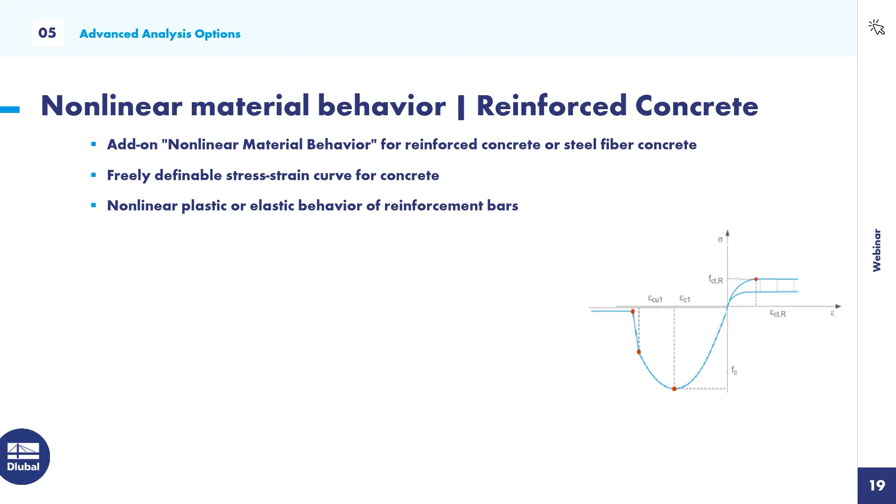Very good behavior for some load history, and the load history which we need, is that we are now able to consider also the nonlinear plastic behavior of reinforcement bars. In RFEM 6, it is now really possible to have a load history. And the nonlinear calculation is implemented now in the main calculation, in the statical finite element analysis, and also in the main program, it is not in the add-on, for surfaces or members. So it's really in the main finite element analysis, and so you are able to interact with other nonlinear materials, for example steel, masonry, and so on.

What is also a topic now possible is that if you calculate a structure, you calculate it with beams and surfaces together, not each type of object alone. You calculate the beams and surfaces in one nonlinear analysis. Here also we can use multiple core calculations, so this will increase the performance if you use the multiple cores from your computer.

Creep and shrinkage is considered at the time of the analysis, so I can make the analysis from one age of the concrete, and then creep and shrinkage is considered to this point.

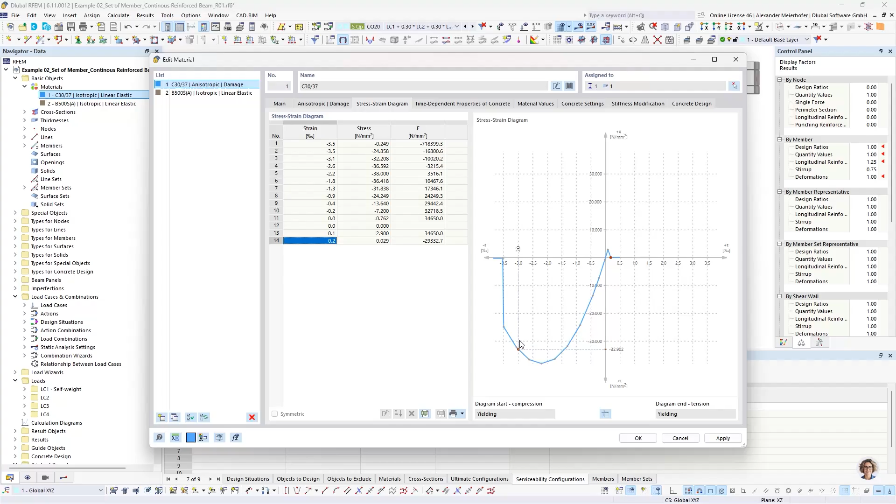You see for SLS we can use it. What is new in this input is that we have generated the stress strain diagram. You can see what diagram is used in the analysis. It's very open, and you can really see the calculation.

Further, we have to do it for our reinforcement. We calculate the material model, the nonlinear one - it's automatically now bilinear. And if I press OK, then the results will be deleted.

If I want to use now the reinforced concrete, I have to activate the structure modification, and I also have to activate the reinforcements which I have to consider in the static analysis. If you calculate it, you will get the nonlinear behavior in the static analysis - the deflection together with the reinforcement and the correct state of the concrete.

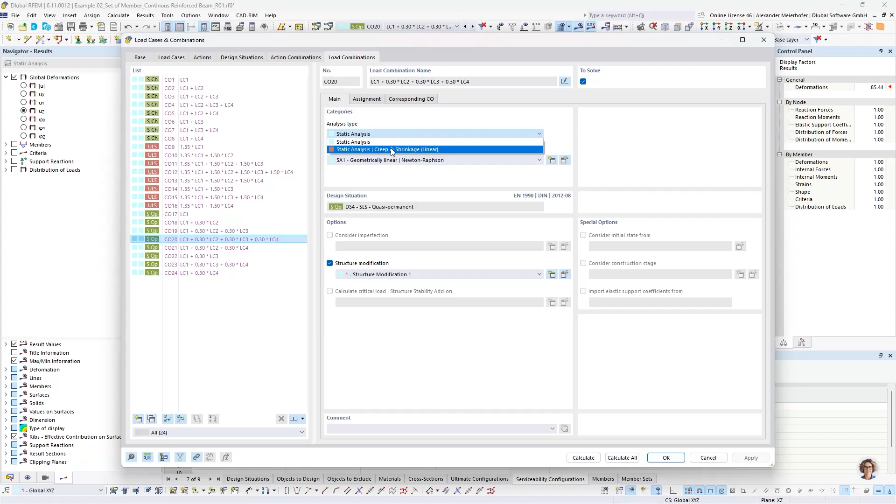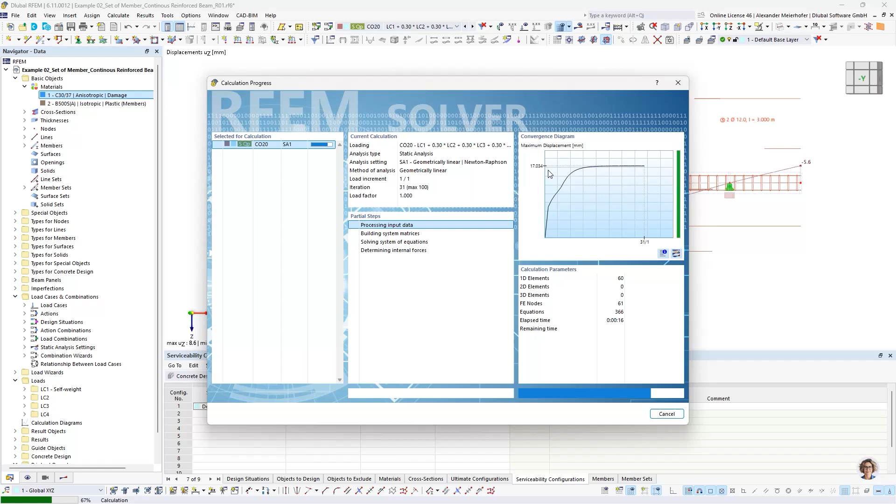Okay, so now we have RFEM 5, RFEM 6, and about RFEM 6 without creep. If you want to consider creep, at about 50 years we start the calculation new. Then we use the creep factor in the calculation, and you see that the creep factor has an influence - we get bigger deflections. It is increased, and we have here at least the level which we got from our effective stiffness method in the add-on.

Okay, let us go back to the slides and go to the next advanced analysis options for the nonlinear material. With the nonlinear material behavior, at the moment it's possible in RFEM 6 to also calculate reinforced concrete solids in the static analysis with a nonlinear material behavior of the anisotropic damage material. So this is also possible.

General cross sections from our section tool can also be calculated nonlinearly in RFEM. This was not possible in RFEM 5 - it's completely new. If you have some special geometry for your beam cross section, you can use the nonlinear calculation because it's totally generally developed.

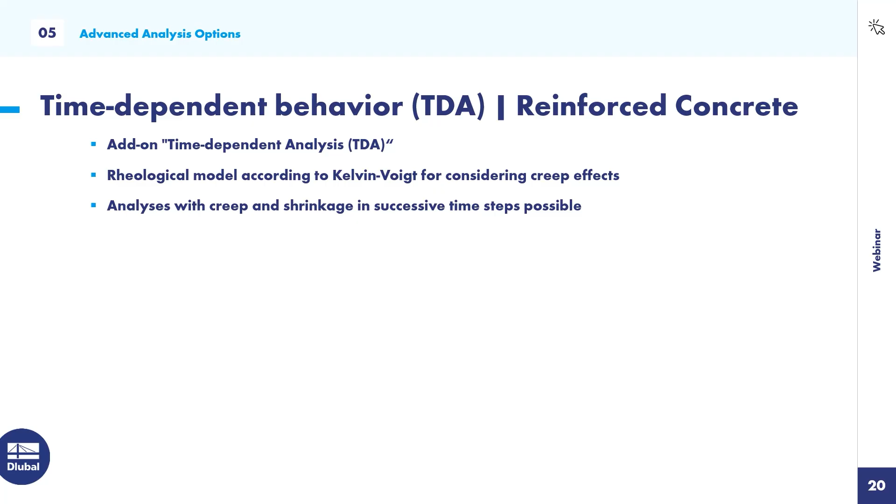The next advanced analysis topic is the time-dependent behavior, in our add-on for time-dependent analysis. We use here the rheological model according to the Kelvin-Voigt approach to consider the creep effects. This means we can analyze the creep and shrinkage effect successively in time steps - we can have a load history, step-by-step time steps, and we can see the results.

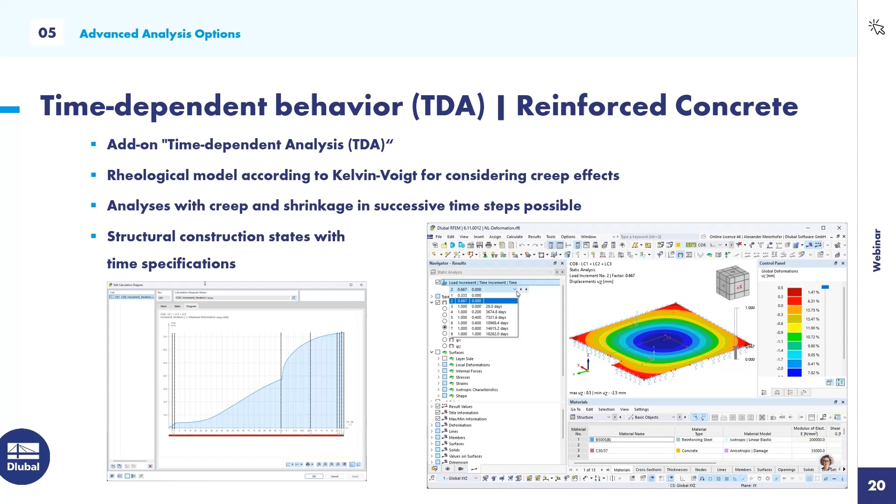TDA is also possible to work together with our construction stages. The structural construction stages can then also be defined step by step, and you can use TDA to give them time properties and settings.

Okay, last point: what we have is the outlook or view into our developments. The first topic I want to mention is that we are developing a punching shear check for double-headed shear studs according to the technical paper which is necessary in Europe.

We already have double-headed shear studs for ACI and Canadian standard, so if somebody has a license from RFEM 6 and wants to see how we could work, select the design code for ACI, and then you can see some possibilities.

Then what we are working on is the static analysis of pre-stressed components, so pre-stressed concrete. This is possible with the add-on tendons. We can define totally free geometries of tendons inside of a beam or of a surface, and if it is inside, it is automatically connected.

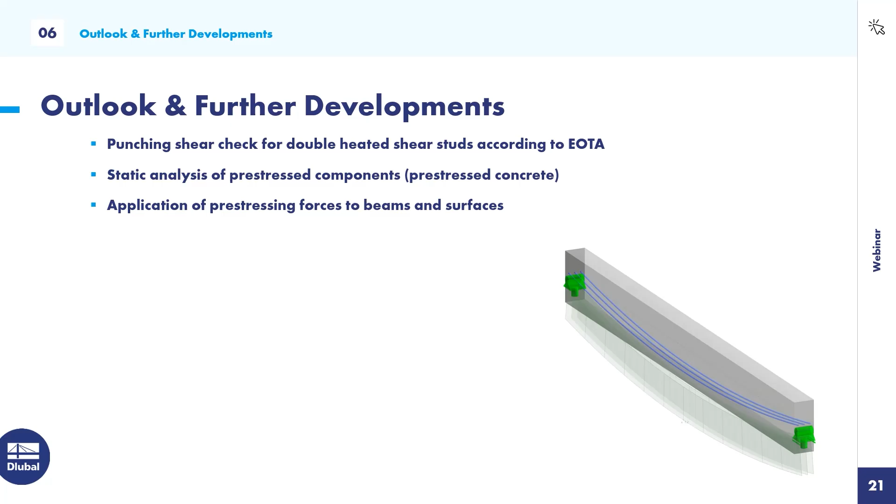The influence of the pre-stressing forces will be directly considered in the static analysis. It is possible at the moment to put the effect of pre-stressing into the static analysis for beams and also for surfaces, for plane surfaces. We are working on the general geometry of surfaces, but at the moment we are able to use it for the plane state.

Then one new development which is now also in our end testing process: it's a new member type with the name rebar. You can use this rebar for totally free geometry, defined totally free somewhere inside of a surface, and in future also inside of a member.

It must be inside of the thickness, and this rebar is then automatically connected. You can then also make some designs of deep beams, like shown here. You will get the stresses, the forces in this member.

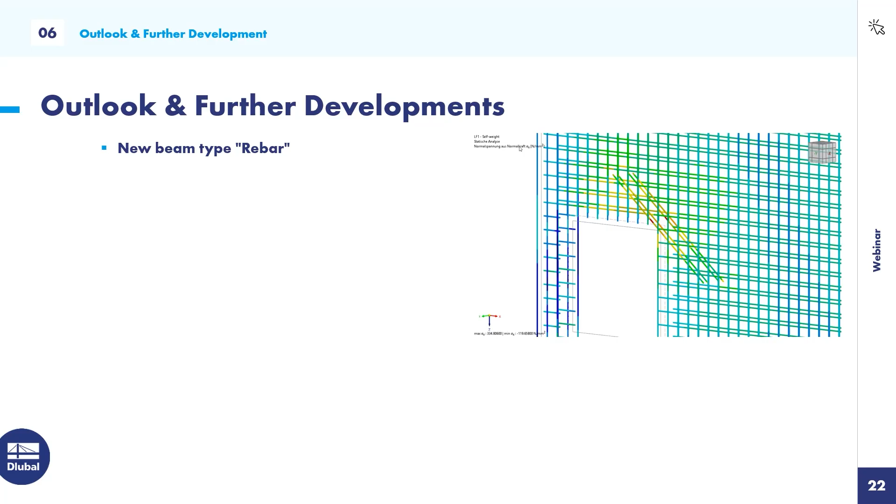If you work together with the nonlinear material behavior with damage elements, then the concrete will be considered cracked, and the reinforcement will take all tension strains. You can also design, for example, deep beams or some walls this way.

What is possible - we made some tests here, just as information. You had a beam designed as a surface, and stirrups and longitudinal reinforcement were used by this definition of the rebar.

Here you can see directly the compression struts, which come from the concrete. It goes from one stirrup end to the other, and we see here how the compression strut goes to the supports, and in the view we see the tension forces in the stirrups developing. Where we have no shear force, we have nearly no force in the rebars.

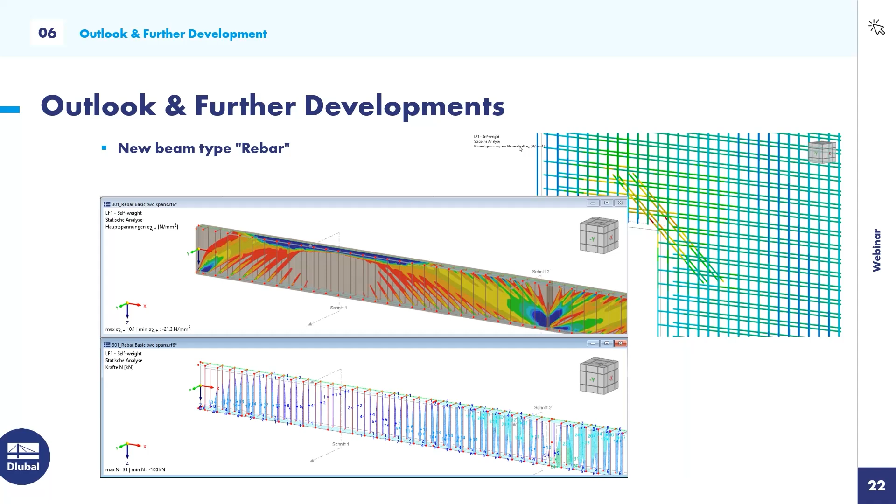So if we want to analyze something deeper, we can use this new member type rebar in the future for more detailed analysis.